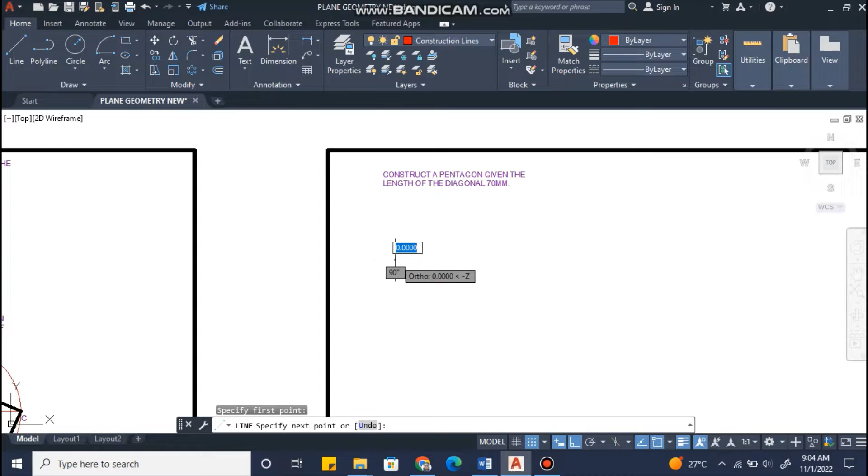In this video, we're going to construct a pentagon given the length of the diagonal, and in this case, it would be 70 millimeters. So first thing, we're going to draw a line LM about 18 millimeters long. We're going to label them.

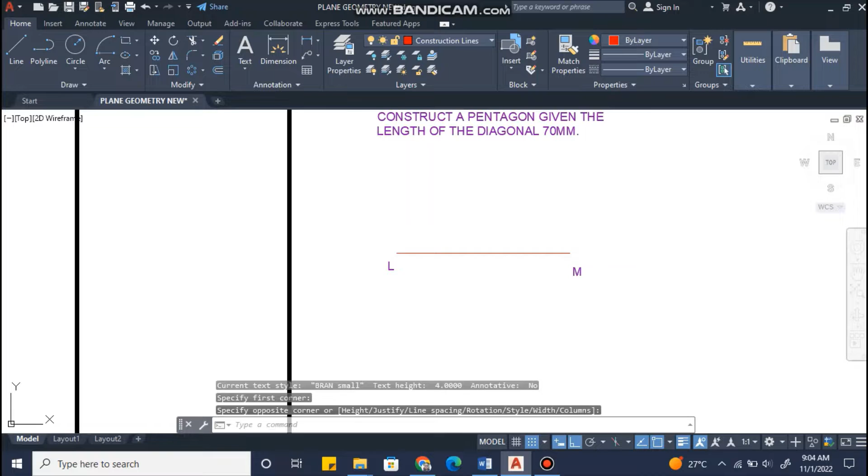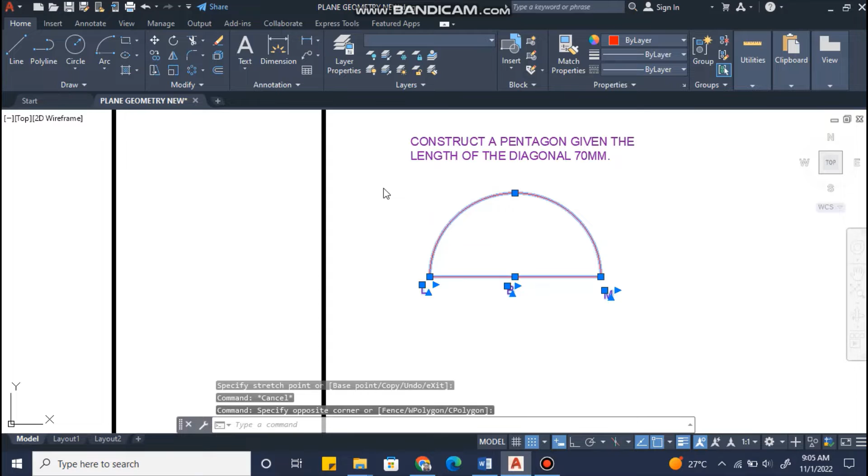Finding the midpoint of LM, we're going to label that point B, and then from B and BM as radius, we're going to scribe a semicircle to cut the line LM. Let's give our drawing a little space.

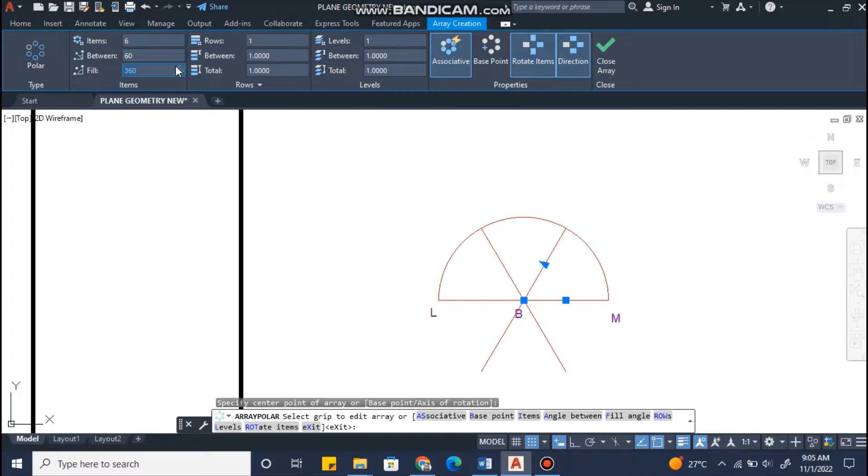Now we're going to draw a line from B to M, and this is going to allow us to divide our semicircle into 6 equal parts. So using B as center, items are 6, and our fill angle is 180 because we have a semicircle.

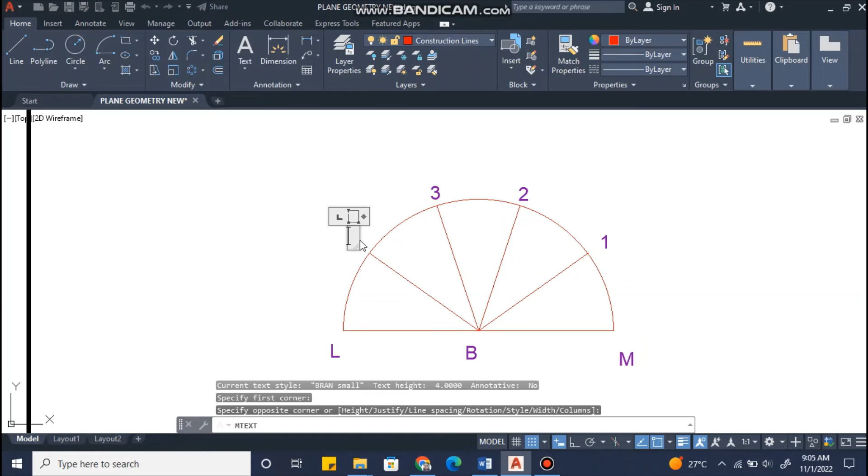Alright, now we're going to label each division of our semicircle from 1 to 5, and the 5 represents the number of sides in this shape, which is our pentagon.

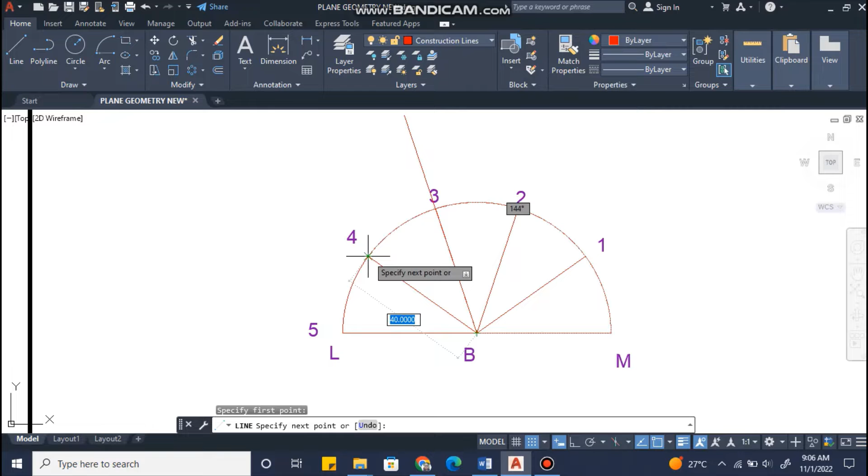Now we are going to draw the diagonals from B passing through 3 and from B passing through point 4, and these diagonals are going to be 70 millimeters.

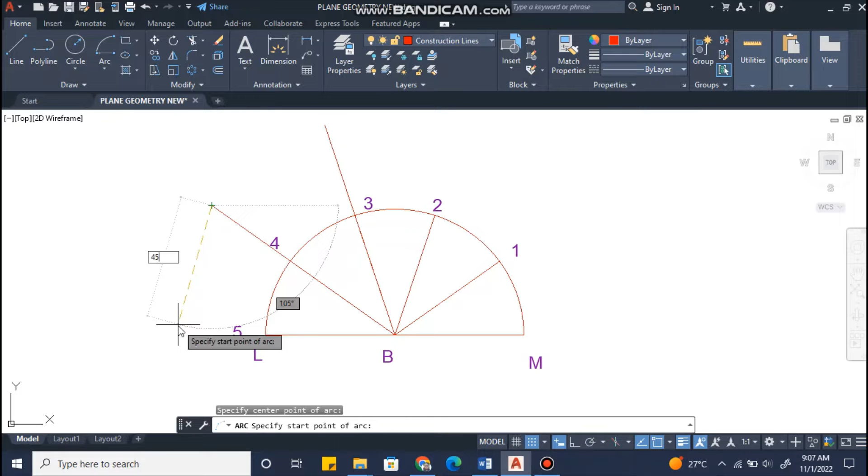Now we are going to bisect our diagonals using any convenient radius. In this case, I'll be using 45 millimeters. Now I'm going to draw my bisector.

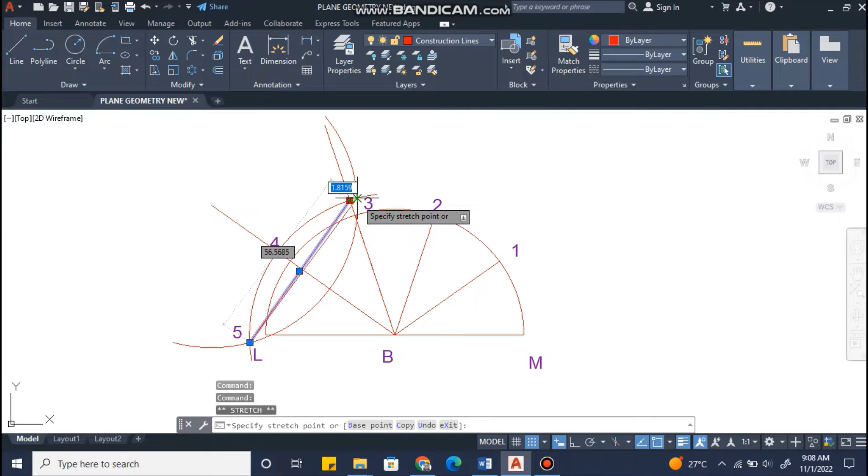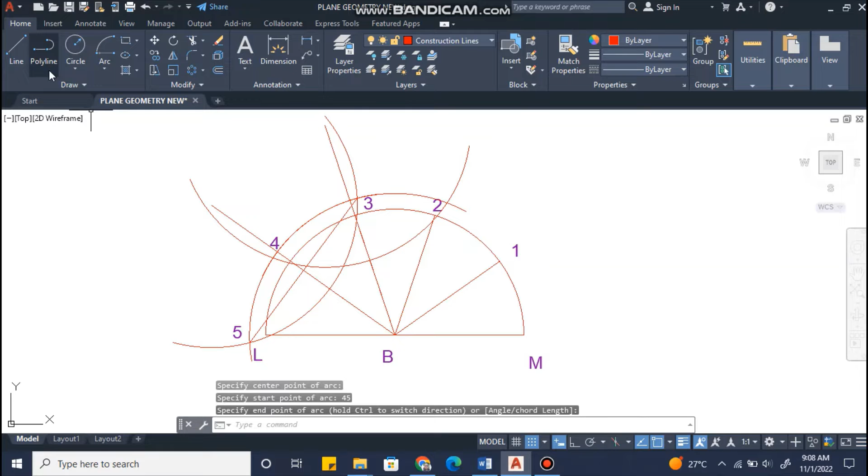And at this point, the drawing gets really complicated. So ensure that the bisector is drawn from where your arcs intersect each other. Now I'm going to bisect my other diagonal. And I'm going to draw my bisector.

Now, where my bisectors intersect, I'm going to identify that point, and I'm going to label it so that I'm aware of where my center is. And I'm going to label it O.

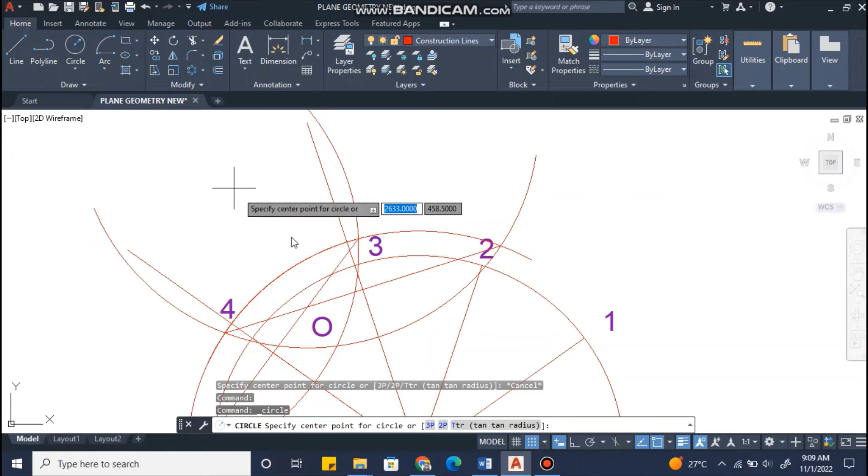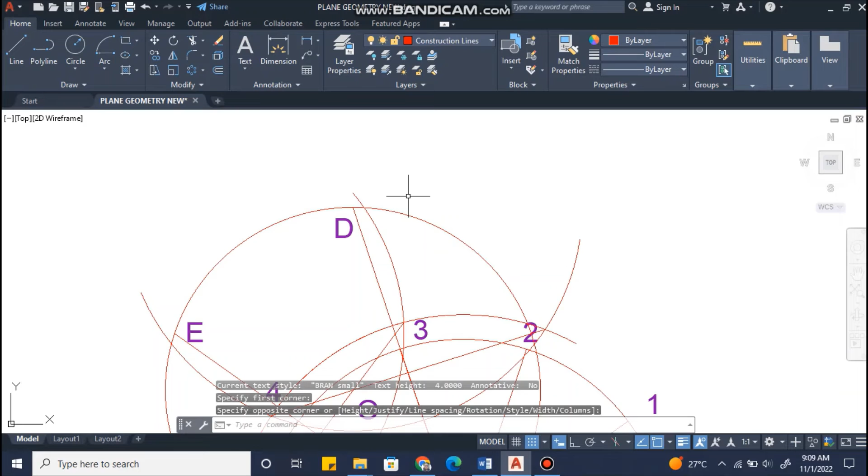Now using O as center and radius to the end of the diagonal, which should be E, sorry. So now I have to go and label this point E. Now I'm going to label the other point, the other end of my diagonal, D.

Now I could go ahead and switch to object line layer and start to form out my polygon. So from B, I'm going to draw a perfectly horizontal line to cut my circle. So ensure that it's perfectly horizontal. Turn on ortho mode.

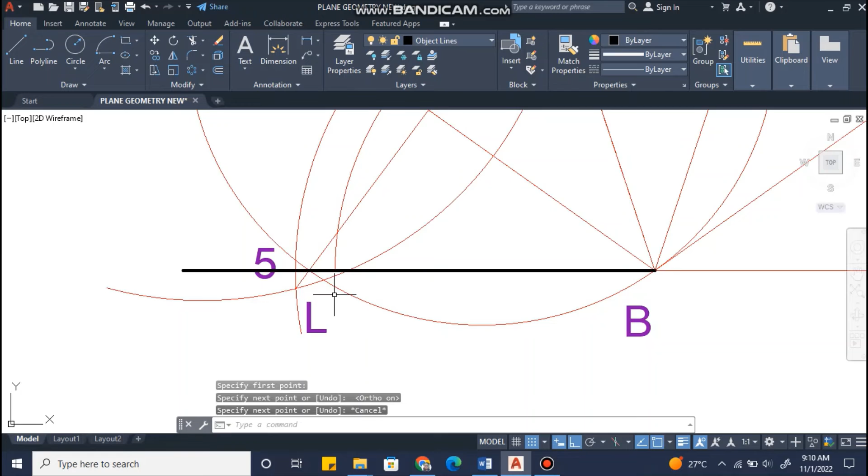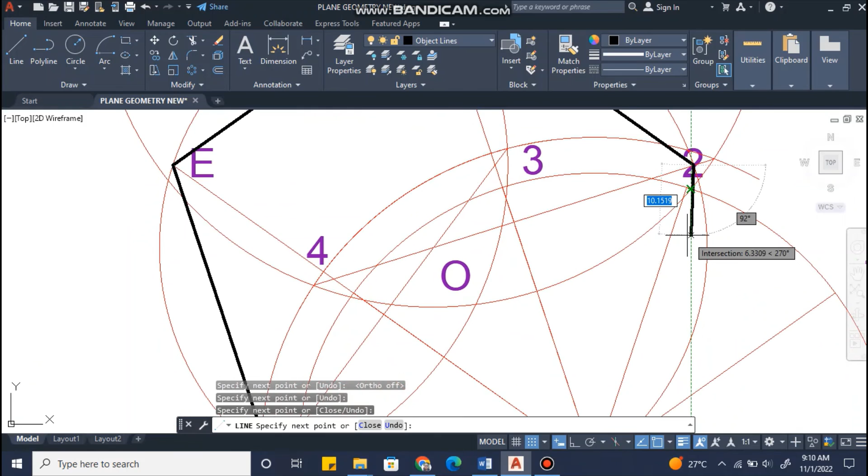Now I'm going to connect this point to point E. Then I'm going to connect E to D, then D back to where my bisector cuts my circle, and now I'm going to go all the way back down to point B. And there I have it, my pentagon, which has 5 equal sides of 70 millimeters. Remember to neaten up your drawing, trim, erase any unnecessary lines.